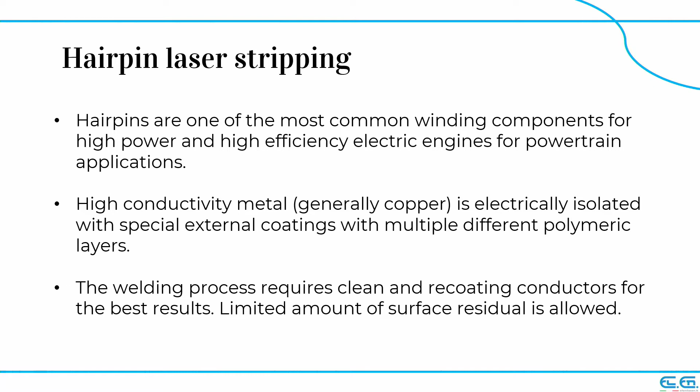We have been listening to welding applications, and we have a very smart solution for improving the quality of welding, but the first thing to take care of is to prepare the hairpin for welding. Otherwise, all the tricks are much less effective. So what our welder friends want to get is a really clean hairpin, without or with the smallest amount of residual on the surface.

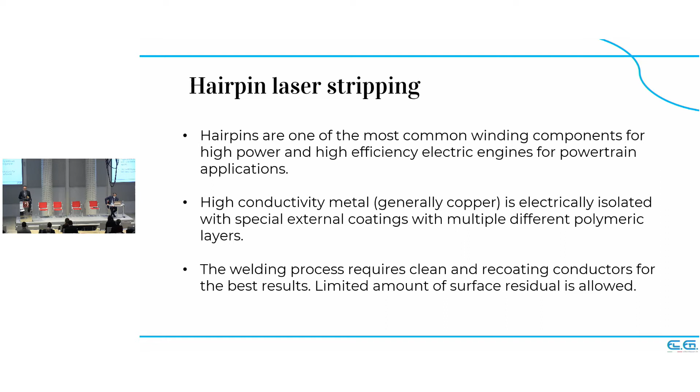So to prepare hairpins we have two ways: one is mechanical, with tools, or using lasers. Users say that the traditional approach is much less flexible and has some disadvantages in terms of how the copper is treated. That said, to get the proper quality, the settings—especially if you change the dimension of the hairpin—require time and skillness.

The laser is a fast, efficient, accurate, industrial proven process. Obviously, the laser doesn't have any contact tools, so the parameters can be safely stored in the recipes, so you can change production very easily, getting the machine set up in no time, practically.

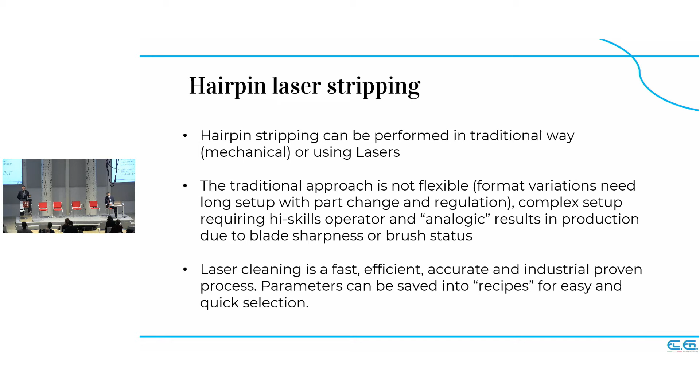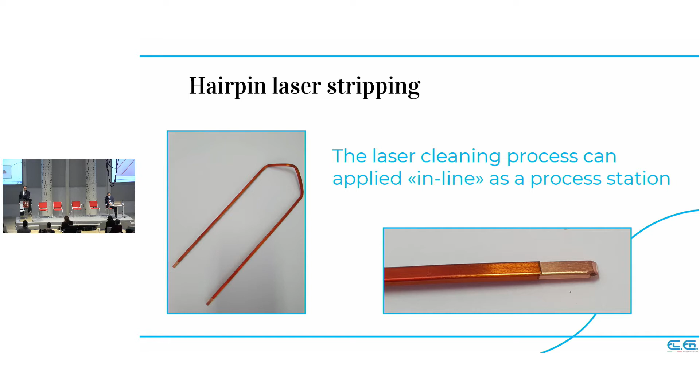We are still in love with CO2 laser, because we are seeing new applications every day. So we started from CO2 application—CO2 wire stripping is, let's say, an old application, and that was the starting point, especially for us, for cleaning up the hairpin. We ended up finding that CO2 itself was not fully cleaning the copper, and so we coupled CO2 with fiber lasers.

How we do it is that we have the stripping station that is based on laser sources and the galvo scanning system in order to speed up the cleaning process. Usually what it is, we have a galvo head controlled by fast, real-time, software-driven embedded solution that can work on the fly. So it means that we don't need any stop-and-go process based on laser needs. We can remove all the insulator around the conductor while it moves, and while the line is forming the hairpin.

The quality of the cleaning, meaning how much of the isolating coating of the copper is removed, at the very beginning looked to be an easy job, because the copper looked very clean after just a quick pass of CO2. But then we realized that the micron-thick residual that was on the copper was not really friendly with the further processes like welding.

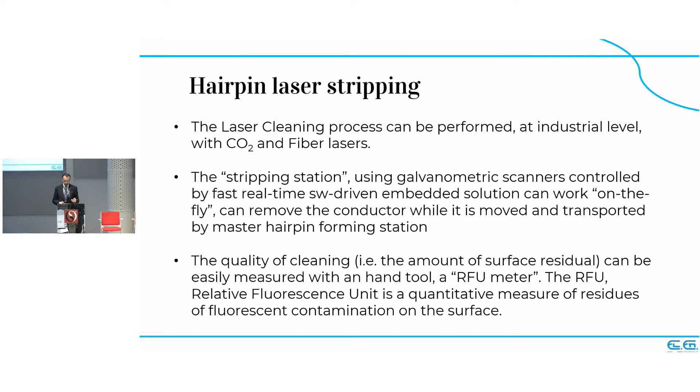So El.En. has developed... we started at the beginning with little players, then now we are working, and this is disclosable, with Atop, that is an IMA group company, with which we have developed an electro-optical platform that is available for integrators. So it consists in laser sources, galvo scanners, hardware controllers, software development kit for PLC integration, and it's the whole solution for the stripping process.

We are in love with CO2, but we have realized that it's a combination of the two lasers that gives the best results. So our platform includes both CO2 and fiber lasers. What we do is have the CO2 doing the dirty job, meaning we use CO2 power to clean up the major part of the isolators. And we use CO2 lasers that range from 300 to 700 watts. The more power you use, the quicker the process.

The advantages of this solution is that the absorption of the radiation of CO2, the 10.6 microns, is very selectively absorbed by the material. So as long as we talk about the plastic-based, polymers-based coatings, they are easily sublimated by CO2. They fully absorb CO2, and the CO2 stops when it hits the copper. So there is no real interaction between copper and laser. We don't heat up the copper, and we don't touch the surface. We don't engrave it. We don't scratch it at all.

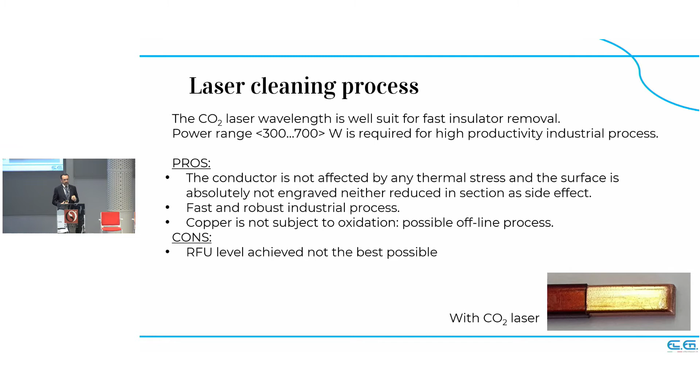It's a fast and robust process because, given the fact that we have this selectivity in absorption, we don't really have to care about very fine tuning, because we have a nice threshold that works with us. Given the fact that CO2 leaves this micron of material, the copper that is cleaned by CO2 doesn't oxidize because we still have this tiny protection. Obviously, this can also be a disadvantage because we still have these little contaminants on the surface that we can test with a few instruments.

So in order to provide a full clean surface, we have coupled CO2 with a mid-power pulse fiber laser. We don't need too much power with the fiber laser, but we still need it to get rid of this very tiny insulant left. So advantages are that we can reach very low RFU values, meaning no polymer is left on the surface, or almost none. And this allows, obviously, a good welding process afterwards.

In this way, we don't have too much production of smoke and dust, because, as I said before, the dirty job is all done by the CO2 previous treatments. Users tend to say that we have disadvantages, like the fact that in this case we don't have the famous threshold I was mentioning before, so we have to fine-tune the process in order not to have the powerful fiber laser be too aggressive on the copper surface. And having a clean copper surface, it oxidizes much more quickly.

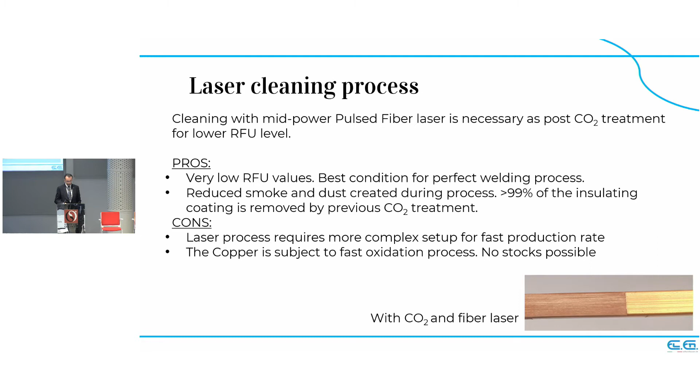So this is the standard architecture. We have the first station that is CO2-based, with two galvo scanner heads that clean up the major part of the isolating on the copper. This is the typical mirror-based beam path. And then we have the same architecture in terms of lightening the wire, but the two scanners in this case are fitted with fiber lasers.

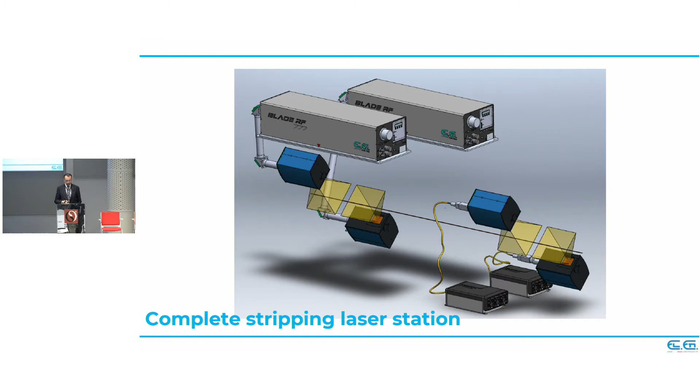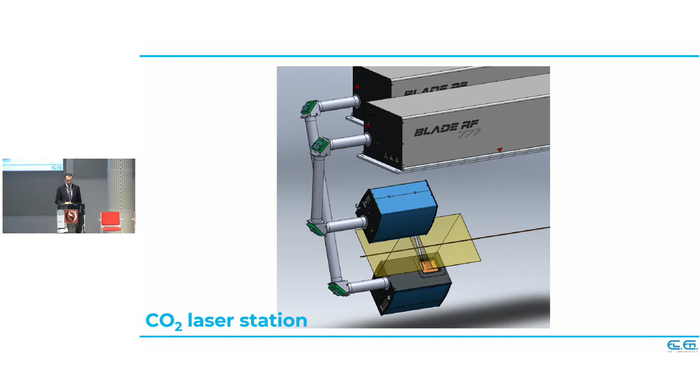We have been talking and thinking about the best geometry in terms of how many heads to use in order to speed up the process and keep the cost of the plant reasonable. We still think that two couples is the best optimization based on our experience. We tend not to have the two scanners light up each other - it's manageable, but this way it's a safer solution, as we have tested, especially in mass production.

The fiber laser on which we base the fiber station is IPG, because it's the best compromise we have found, both in terms of quality and price, and we have long-term experience with this kind of laser, so we know them very well and we trust them.

In terms of CO2, it's fully made in-house, and we have rejuvenated the CO2 laser concept, having our never-ending power solution that is based on lasers that have got a laser cartridge able to refill the laser.

So we have this family of lasers that goes from 350 watt up to 850 on the same size of laser. Then we have also higher power up to 1.5 kilowatt based on this self-refilling technology. We're talking about a pulse laser that can reach peaks up to 1800 watts in this family range.

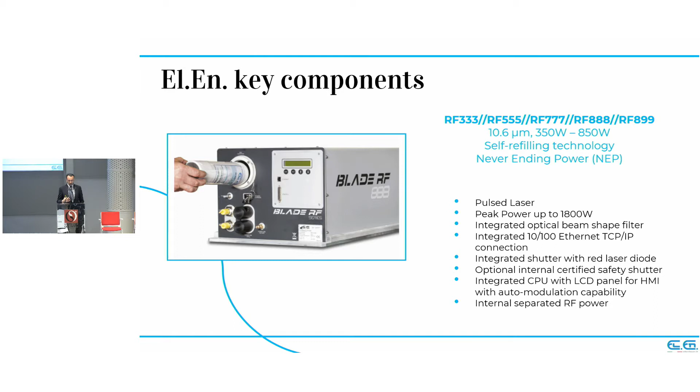We have the spatial filtering inside, so we have a very nice zero-zero mode, M-square output. We have integrated 10/100 Ethernet TCP/IP connection, shutter with red diode laser in it, and this is very helpful for the tuning of the process, for the alignment. Safety shutter - we have a lot of supports to make the laser very easy to integrate.

I'll skip the little movie about the self-refilling technology, but this is something that allows the laser not to need to be refurbished or replaced over time, because virtually it's a never-ending laser - everything that gets worn in the laser can be easily refilled by this gas cartridge that we provide. Especially in the automotive industry, where downtime is not an option, this kind of laser allows a virtually endless and very stable process with constant and consistent power.

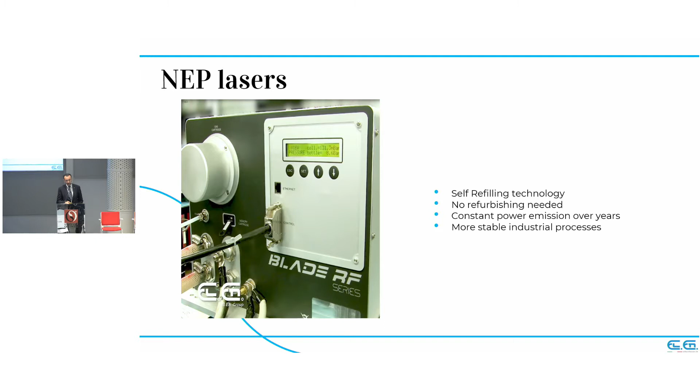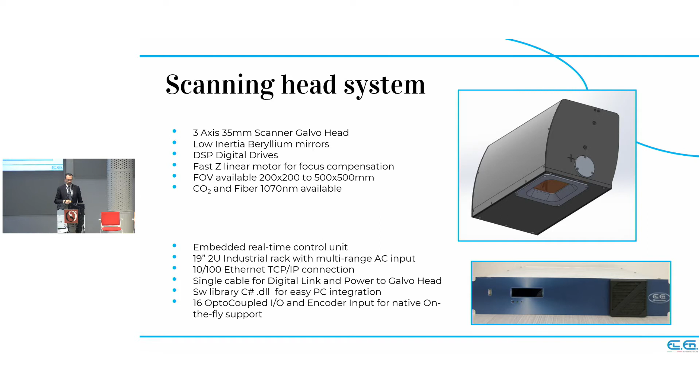The other key component of the station is the galvo head, which for this application is a 3-axis, 35 millimeter optical aperture scanner galvo head with very low inertia beryllium or special alloy mirrors driven by digital drivers, with a third axis that in real time adapts the focusing of the laser, and a field of view that goes up to 500 by 500, which we've seen is what we need in this field. Usually our heads are able to manage both CO2 and 1 micron fiber laser.

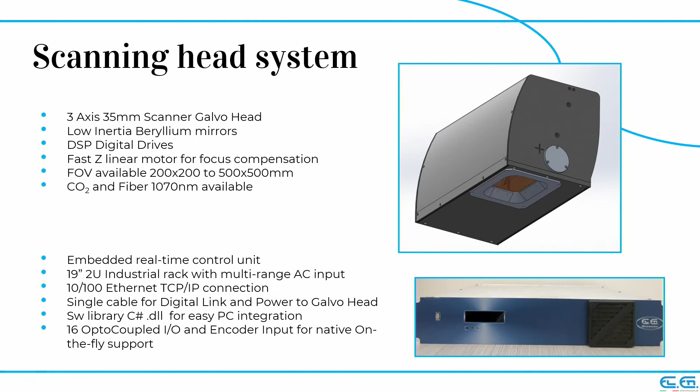The control unit - we provide the whole system: laser source, galvo head, and the control unit itself. It's a real-time one, standard industrial 19 inches, 2 units industrial rack with multi-range AC input, Ethernet connections, a simple single cable that links the control with the head for both signal and power, software library available, and optocoupled I/O to connect to the rest of the system and encoder input for inline processes. So this is the quickest way to show you what we deal with.

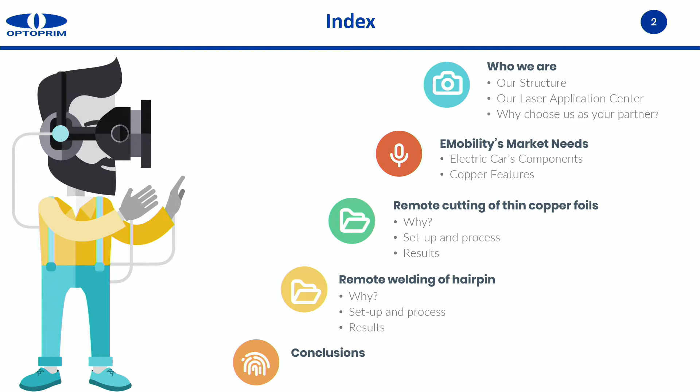So who we are: Optoprim was established in 1994 in France as a distributor for optical components, then expanded in 1999 into Italy, and in 2004 into Germany. Nowadays we are about 85 people, 30 of which are in Italy.

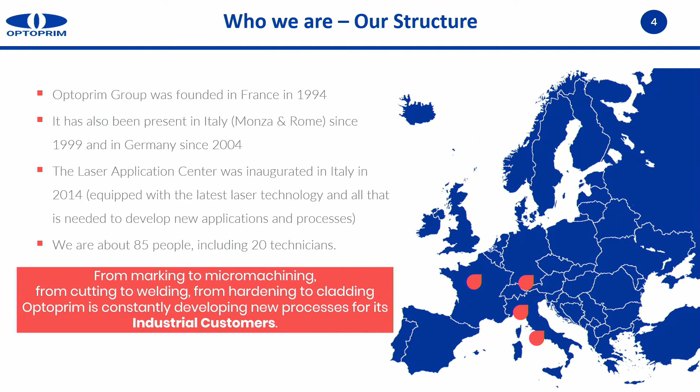The main turning point, which I'd like to stress in this speech, is that in 2014 we established in Italy a laser application lab. The target of this small section of Optoprim, which is actually growing, is to deal with applications from customers and use the knowledge we've gained over the past years as distributors.

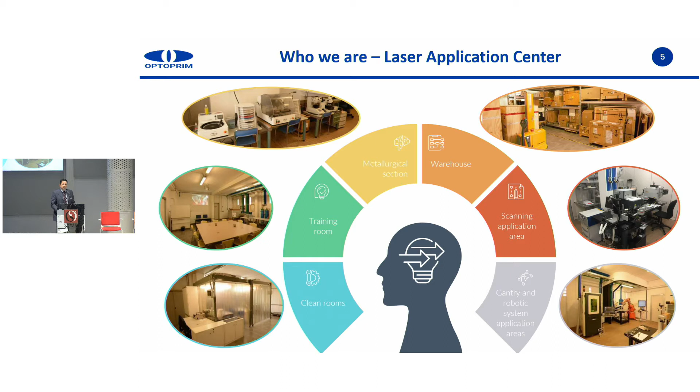This is a quick overview of how the application lab looks today. We are quickly moving into another building where the application lab will be larger, with dedicated cells for applications. We deal with several kinds of lasers, different wavelengths from CW to femtosecond, and also with optics and measurement instruments which enable us to check how the laser is performing.

And also to check the results of the process we've performed. For the types of applications, as we have different application engineers in the lab, we focus on different applications with specially selected people. We cover everything from cutting to micromachining, welding, brazing, any kind of application that can be done with lasers, and we have the key components to properly deal with each of these.

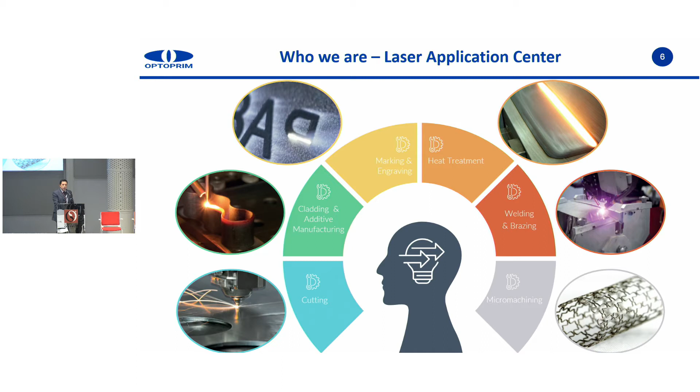So why are we offering ourselves as a partner to integrators in Italy and Europe? As said, due to our knowledge from being a distributor for several years, we are in touch with the key world players for the different parts you need for a laser system. We can select the technology depending on the needs of your specific application, and we have the experience to put together the different parts to get the best out of it.

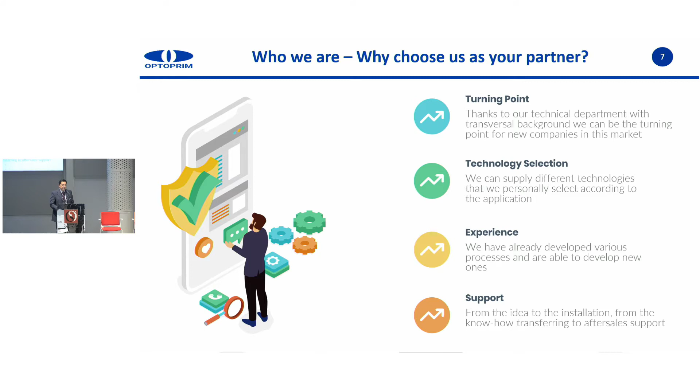Also, we support our customers in doing the initial tests, supplying the subsystem, installing and getting it running, and also providing after-sales support.

This has already been covered in a previous discussion, so I'll go through it briefly. In e-mobility and building an electric vehicle, you have several items where laser can be used to address specific needs, mainly batteries, packaging and pairing, and also the stator. Here you need laser for cutting, welding, marking — all of which can be addressed by our solutions in our lab.

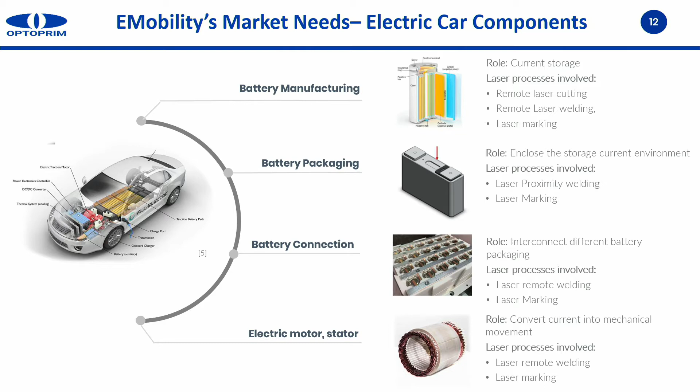As said, for building this new equipment, you need to use specific materials, and some of them are trickier to use with laser. I wanted to focus here on copper.

It has already been said that copper at ambient temperature has low absorption in the infrared wavelengths, but has higher absorption in the blue. So depending on the specific need, you would either go for higher intensity infrared or instead move to shorter wavelengths — and we can do both. We have setups that can cover both demands, and in some cases the first one is winning, while the second has other advantages.

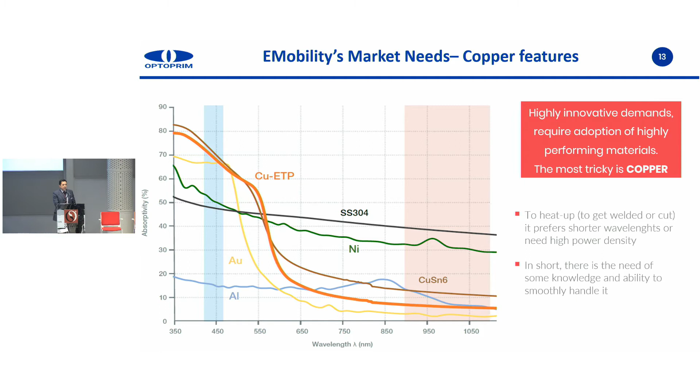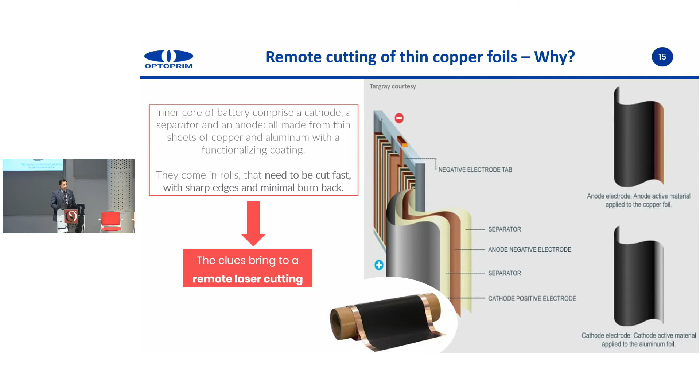Let's look at the first application, regarding the manufacturing of the internal part of the battery, where you have to deal with thin sheets of copper, aluminum, and also a coating on top. As these come in rolls, you need to cut them with good geometries, without or with very little burned part.

All this information tells us that the approach is to use remote laser cutting, based on a laser. In this application we use an infrared fiber laser with single mode, so we can have a very fine beam and higher intensity to properly treat copper, along with a scan head with an f-theta lens that lets us go very fast and cut over a large area of these foils.

The material in this specific case was copper, usually 20 micron thickness, with a coating on top bringing the total thickness up to 150 microns.

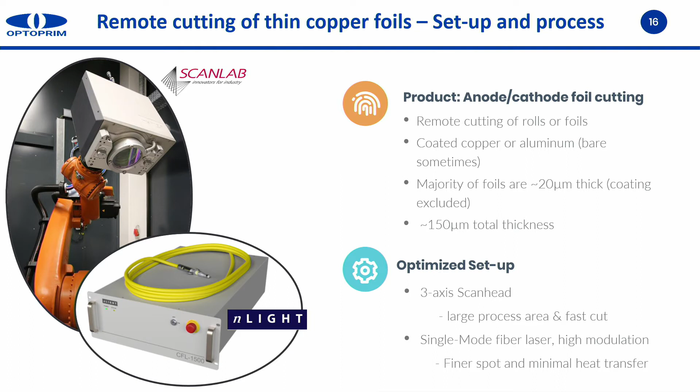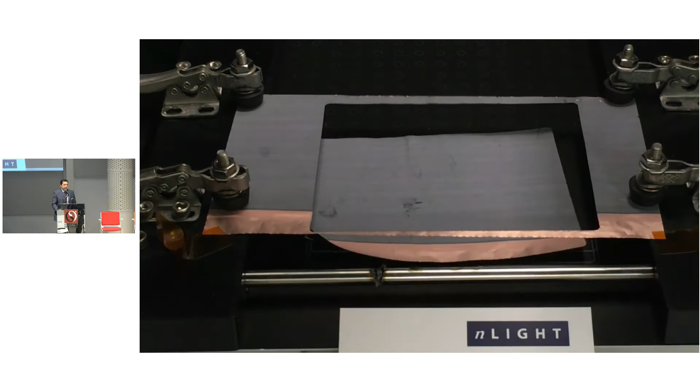Here is the result. As you can see, it's a very fast and very nice cut. Afterwards we had an overview of the result on the cut side, and we were able to achieve what the customer was asking for: a depletion zone below 25 microns, the area where the overlay part is still present, and a minimal burr on the cut.

The advantages of this approach are that it's more flexible than mechanical cutting, so you can change shapes, and it has a modular design where you can add multiple lasers and multiple heads to get higher throughput.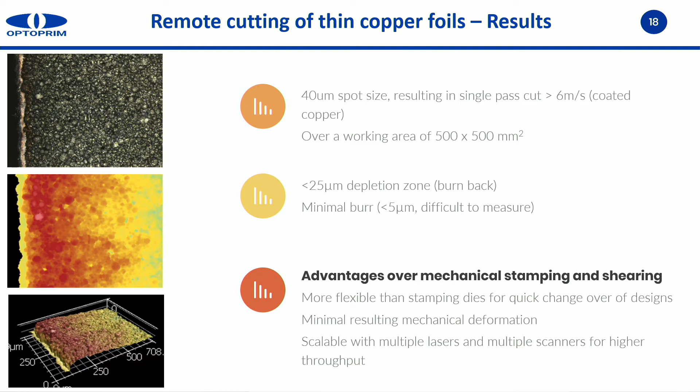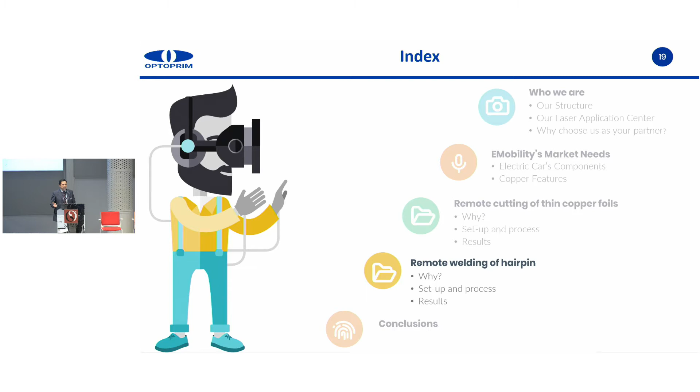Next, we wanted to give an overview of what we are capable of. The first one was cutting with an infrared laser. The next one will instead be welding with the blue laser, and this is where we think there's a benefit.

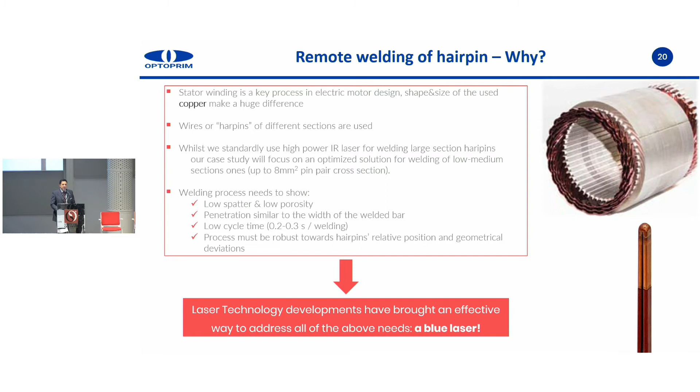Stator design requires the use of copper in different shapes, stripes or hairpins, also different sections. So different approaches are required depending on the specific need.

Infrared has already been seen, and we have the ability to use this as well with wobbling, but we wanted to show a different application where, for sections up to 8 millimeters square, you can benefit from what the blue laser technology has brought.

What the weld needs to provide is low spatter, low porosity, a good penetration depth, and low cycle time. Also, the process must be robust against some mechanical misalignment, since during the positioning of the pins there might be some unwanted misalignment.

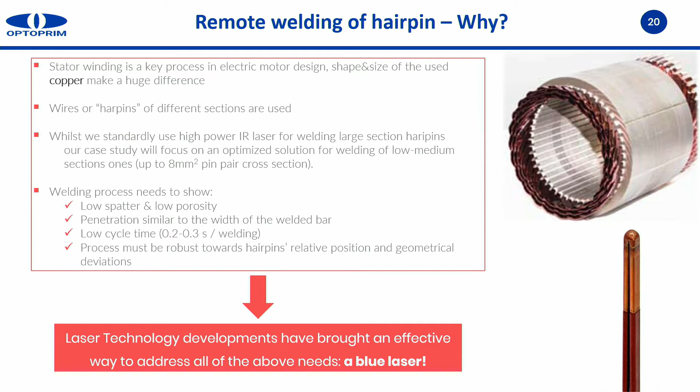So either you have a vision system which helps you achieve good positioning, or we can have a more tolerant setup that can support you.

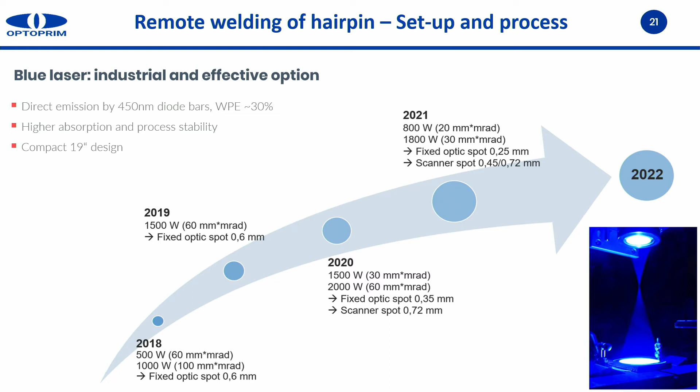Blue laser has already been discussed a bit, but I wanted to stress that blue laser has already been in industry and manufacturing for several years, so it's a reliable source that has been used widely. It started with 500 watts in 2018 and has been growing in power and application spread.

Nowadays we are able to supply 800 watts when used through a scan head, or up to 1.8 kilowatts with a fixed head, and by the end of this year this power will increase further. The other advantage is that it's based on direct emission of diodes, so there's no conversion efficiency loss and there's a very high wall plug efficiency.

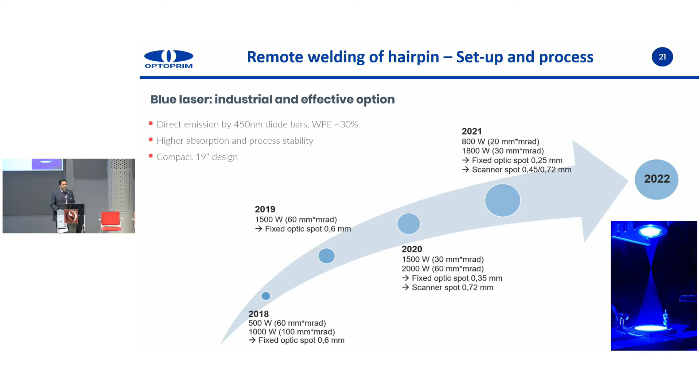The application here is welding of hairpins. The setup uses a two-axis scan head to correctly position over the different pins available on the working area, and we're using a 1 kilowatt blue laser coupled to the scan head.

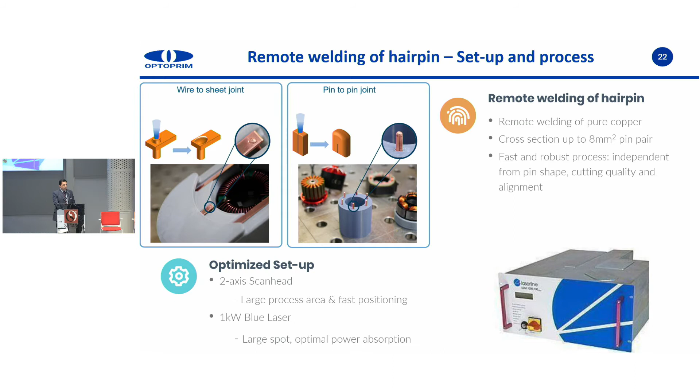This results in a large spot, which gives some benefit, and an optimal power absorption, as copper is very absorbing immediately at this wavelength.

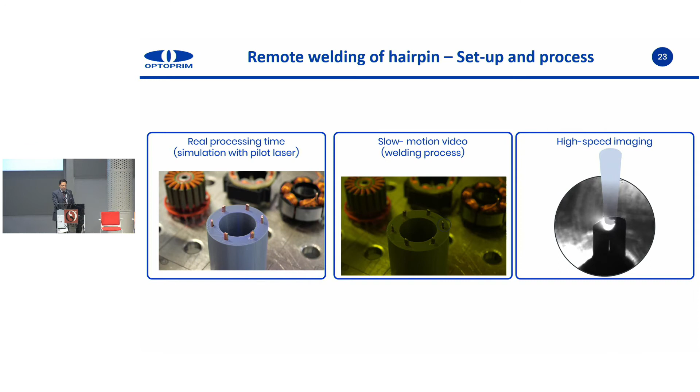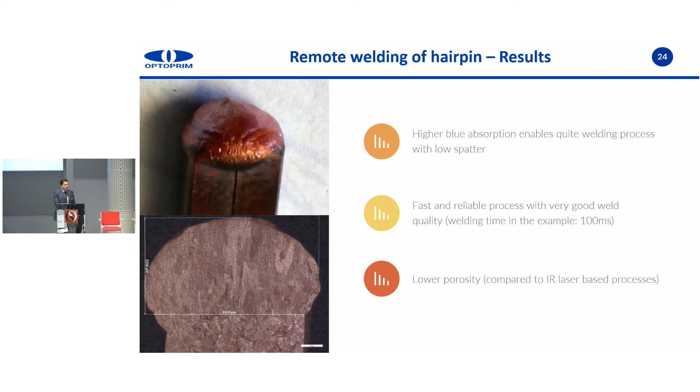We inspected the sample, and again, due to the high absorption of the blue laser, we have a fast, reliable process with very good weld quality. Through the cross-section you can see that the porosity is very minimal.

The other advantage is that in this setup you can have a spot on the sample ranging between 500 up to 700 microns, so it can be more robust depending on the different sizes of the hairpins, or if there is any misalignment between them.

In this video you can see that with the same setup you can easily process different parts with different shapes, and even if parts are misaligned, the larger spot bridges the difference, the gaps between the two.

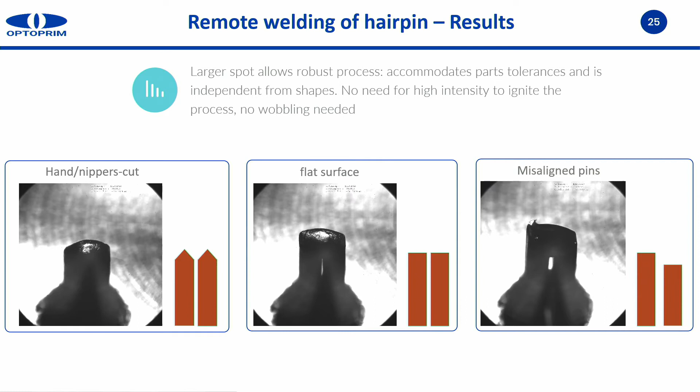Also, you are capable to do other stuff where maybe you have a bundle of wires, and as the spot is large, as the absorption is high, you can easily melt them properly together. In the video, you see that the process is very quick and calm, and on the other side you can see the quality of the weld.

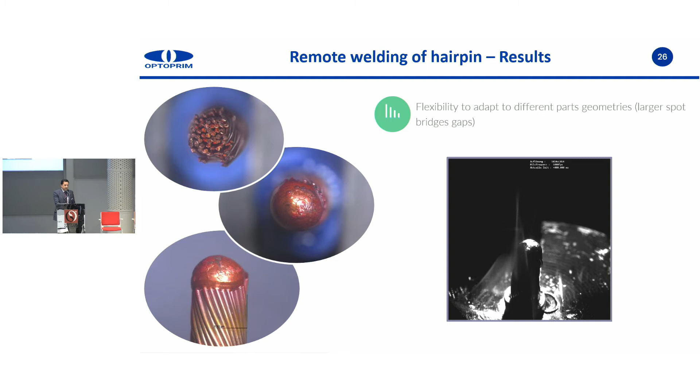As a conclusion, I just want to highlight that we have a comprehensive set of lasers and heads in order to process virtually any laser application. We have the experience and knowledge of our company, but also the support of our partners worldwide. Our core business is the success of our industrial customers, so we want to be their R&D lab for lasers. We are not dealing with integration of production lines, we just want to add our knowledge to the knowledge of the customer.

The turning point for our customer will be drastically reduced time to market, which is crucial in this specific opportunity, and we are able to supply a very reliable product. So this is the end of my presentation. I thank you for that, and I invite you to visit our tabletop in the other room, where we have another system running, and we have some giveaways for you to remember Optoprim in the future days. Thank you.

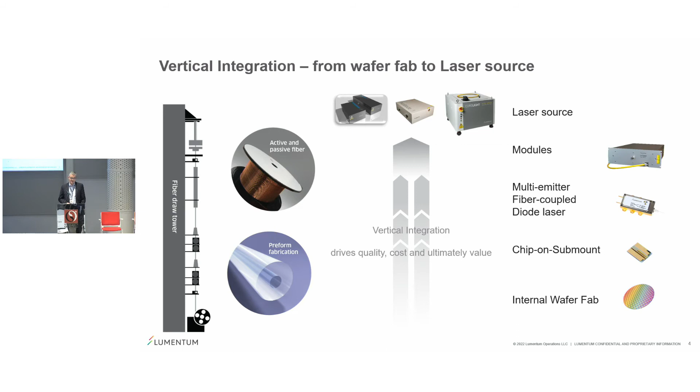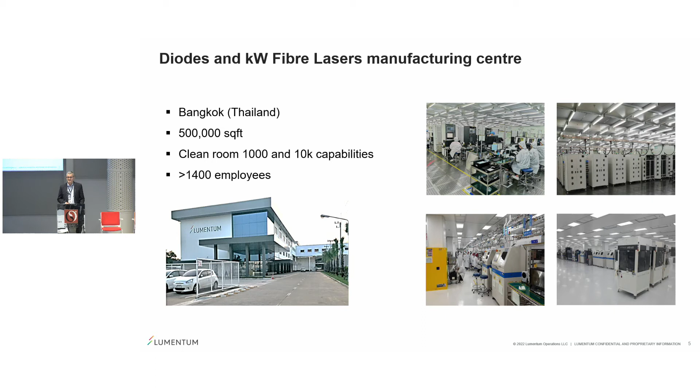In terms of technology, we are vertically integrated. So we start at the wafer level and go up to the end product, the laser you would be using in your machine. And the optical content typically inside is usually Lumentum most of the time. And we make our own fiber, we make our own chips, and we assemble these in our facility in Asia, where we have 500,000 square feet. So this is our main facility in Thailand. And obviously we are using contract manufacturers located all over the world, typically in Taiwan, China, and Thailand again, to make sure we can address this fluctuating demand of our customers.

So why does electrode processing matter? Basically, first of all, I think what you want to do is take it from the end user angle. You've all heard that battery capacity is going to go through the roof. It will increase from 500 gigawatt to 3 terawatts. Depending on the analyst, you can actually pick any number from 2 to 4. So the demand is going to be big.

We know that. However, what people know less is if you take, as an example, a BMW i4, 40% of the cost of the car is actually coming from the battery pack cost, which represents the major cost item within the bill of material. 75% of this pack cost actually comes from the battery cells, the electrodes, with the remaining 25% coming from the module and the pack only.

So gigafactories as well, what you need to understand is they operate on a very low operating margin. And as you know, the cell cost has been decreasing dramatically over the last few years, and they expect it to decrease dramatically over the next few years by at least 50%, based on what we understand. It's actually very important for them to control the yield, the reject cost, and be able to support the highest throughput possible.

However, this trend started from Asia. I would say the Asian suppliers, in terms of gigafactories, in terms of ecosystem, in terms of machine builders, are literally 3 to 5 years ahead when you compare this to the machine builders or gigafactories in Europe or in North America. And they've been doing this for a long time.

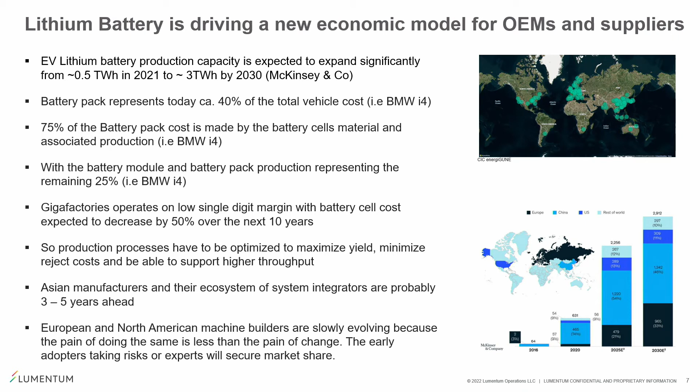So for European and North American machine builders, the ones who are slowly evolving, it represents actually a major interest sometimes to jump from the mechanical process to the laser process, because it's a risk, it's an investment going away from mechanical to laser, and usually the pain of staying the same is basically less than the pain of change. So typically what you would see in Europe, for example, is in terms of machine builders, the big machine builders have already embraced laser, but the typical medium size, small size have not already embraced this kind of technology.

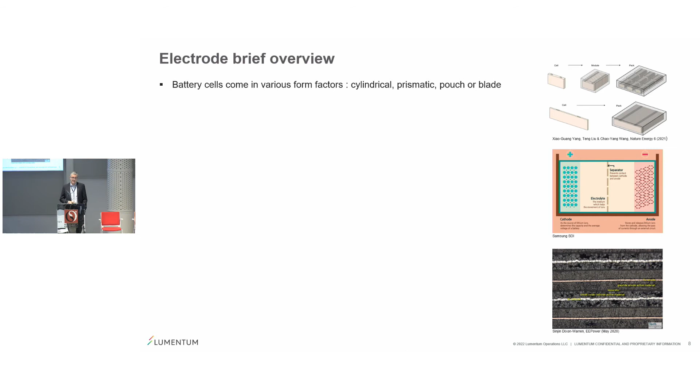So before going through the laser itself, I wanted to share with you a bit more, for the ones who are not familiar with the electrode, what they are composed of, what they are doing. Basically, the cell comes in various form factors. They basically can be cylindrical, prismatic, or pouch, or blade. The cells are basically assembled then into module and pack, and the cell itself is composed of 4 parameters.

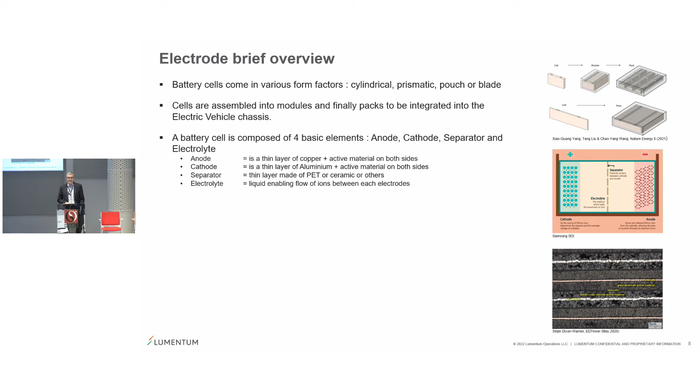The first one is the anode. The anode is a small layer of copper, typically in the tens of microns, with an active material on both sides, typically graphite. The cathode is aluminum-based. Again, it's a very thin layer in the order of tens of microns or less, with an active material on both sides. There you have more exotic materials, and it depends a lot from one gigafactory to another. There's a lot of variability in that space, so you don't have one size fits all. You can have materials like NMC 622, 811, or any other type actually that they're looking at today. It's very versatile. The separator can be a sort of PET, PE, ceramic, or some other material, very thin.

And finally, you have the liquid electrolyte in between, which facilitates the traffic of ions from one electrode to another. The electrodes, the anode and cathode, are manufactured through a very complex roll-to-roll process.

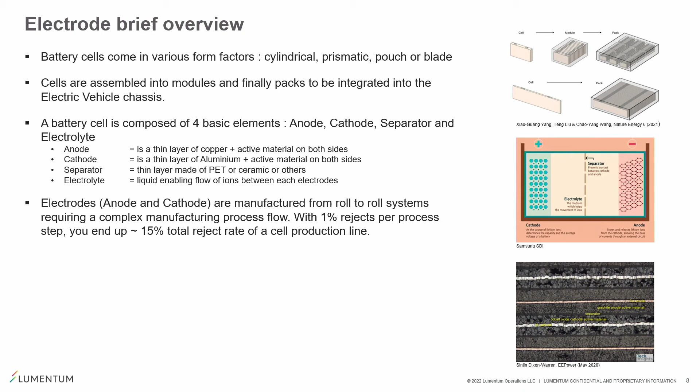There are so many steps in this process that even if you consider a 1% reject rate, you end up with a 15% yield drop, which is huge in terms of manufacturing. In our laser space, when we make lasers, a yield impact of 15% is enormous, not acceptable. It's the same in this space. That's why they are dealing with a single-digit operating margin.

On top of that, new electrode technologies are coming in, things like silicon anode or lithium metal anode, semi or solid state, oxide, ceramic electrolyte. My background is physics - I learned more in chemistry over the last 2 years than I wanted to imagine, to be honest. There are many types which are going to come over the next 5 to 10 years to disrupt what people are currently using, simply because they want your car to go longer and faster with this new technology.

So the adoption curve that everybody saw so far is not going to be as exponential as everybody says. Yes, we're all going to drive an electric car at some point, but it's actually going to be slowed down because there's going to be raw material shortages. All analysts predict that nickel, for example, will be in short supply within 1 year. Lithium will be in short supply within 3 years, and cobalt will be the same. So there's going to be a bottleneck at the raw material level.

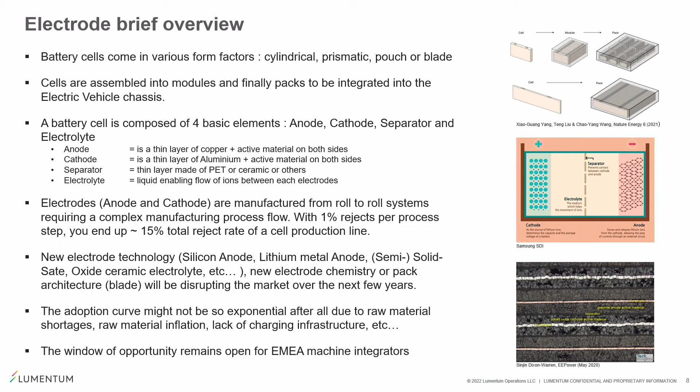Price is not going to go down as expected. It will actually be higher in 2022 in terms of material cost and cell cost. So it's going to make life tougher for the gigafactories and make them master even better their electrode manufacturing. So the window of opportunity for EMEA machine builders is actually great, meaning the ones who haven't embraced laser technology yet will be able to do so and catch up - they haven't basically totally lost the battle here.

So what's the technology used today? Today it's primarily mechanical solutions. People are using, for example, knives for cutting or stamping. You can see here in green on the right-hand side what people call slitting, which is basically when you cut the mother roll in two to get the daughter roll. The cutting is usually vertical, and the notching is when you create the tab.

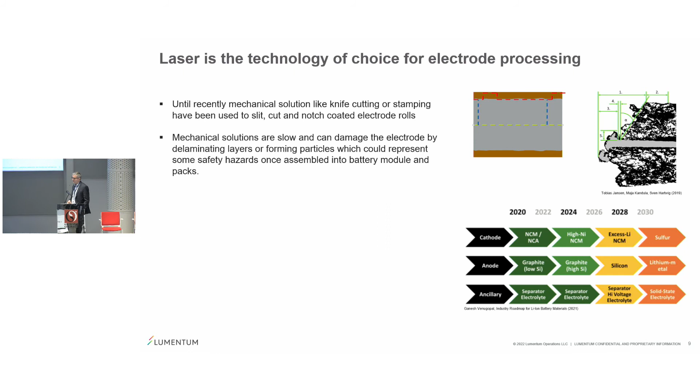And the mechanical solutions typically are slow. They create damage, they create delamination. So if you see, for example, the current collector here on the right, with a mechanical solution you occasionally get delamination between the current collector and the active material on both sides.

So it creates safety hazards once assembled into modules and packs. The mechanical tools also require maintenance - they wear and tear. A laser does the same, but in terms of service time, a laser can run 20, 30,000 hours. A mechanical tool will not - you have to basically change it and upgrade it on a regular basis.

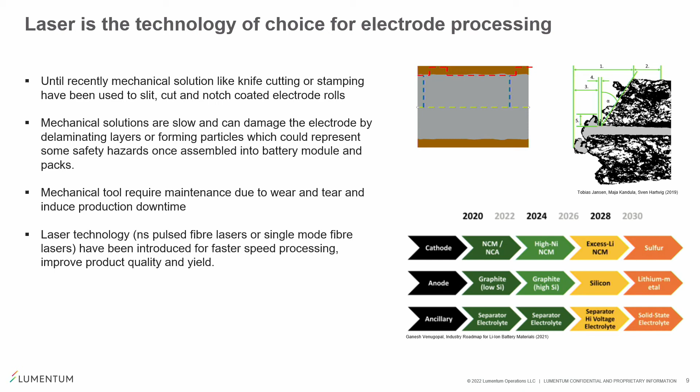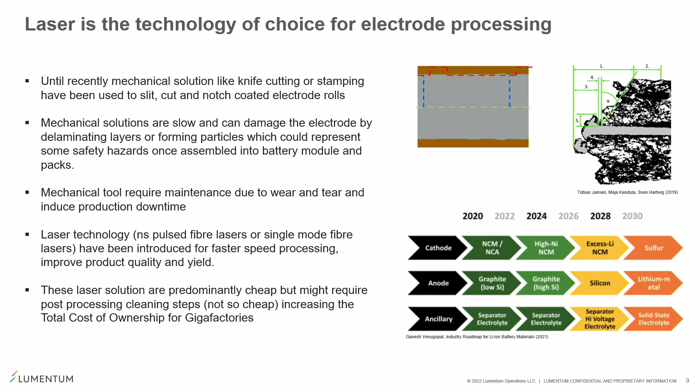So laser technology like nanosecond or single-mode lasers have been introduced over the last few years, starting first in Asia but getting introduced slowly but surely in Europe and the US. They have improved the speed and the quality. But this solution sometimes, if you go into the details, requires a cleaning process. So although the laser on one side is cheap, the additional step for cleaning is not so cheap when you consider the total cost of ownership.

So what are we trying to achieve? First of all, there are two conflicts - actually it's a three-dimensional problem. There are many conflicts in this problem. The first one is between cost and energy.

If you look at how this electrode market is segmented, if you want to go low cost and low energy, there are many types of batteries you can find on the market today in Asia based on LFP type electrodes. When you go into medium cost and mid-range energy, NMC starts to be the predominant technology of choice, 622, 811. And after that there are more exotic materials when you want to go high energy. The problem with these is they become high cost, and it's not something you want to have in your car - it's not something which will facilitate the adoption curve of EV batteries.

So ideally, you want to be low cost, high energy. On the other side, there's a second conflict between energy density and power, and power density.

Usually here, the conflict is the electrode design is not the same, and you end up with two different types of electrodes. Usually the one which helps you go far but will charge slow, which people call the marathon runner, typically are thick and densified electrode with a thin collector. On the other hand, when you want power, unfortunately, the one which charges fast and drives short will be thinner with porous material.

This is very important because if you understand the chemistry and structure of the electrode, you will understand that the interaction between the laser energy and the material will be different. So you can't use the laser in both configurations, right? The interaction between the energy coming from the laser beam and the material will be different.

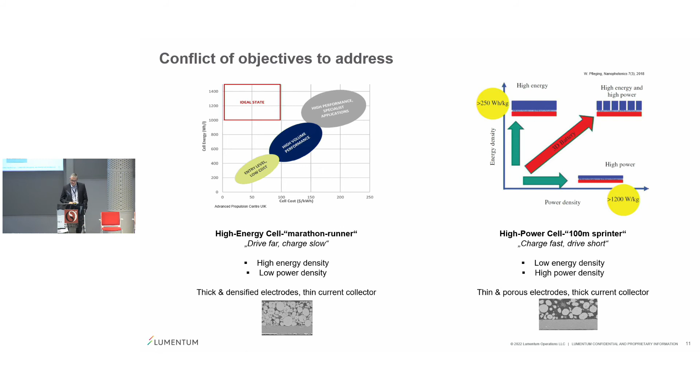Now to make sure you understand even further, I took this from a car OEM perspective. From a user perspective, all this OEM car wants: they want to extend the range, extend power, improve safety, they don't want your car to burn in your garage when you recharge it, and they want this to be affordable. They want the total cost of ownership to be low.

So how does electrode processing enable that? First, to improve range and performance, you need to improve the cell energy density and power. To do that you have two options. You go below on the graph here, you improve the cutting quality, and to do that you reduce HAZ, the heat affected zone, which is basically dead material, a loss of zone for energy within the electrode. Although it's so small, when you scale this to the size of the car and the number of electrodes you need, you realize you miss quite a good percentage which enables your car to go further.

The second part, which enables power, is more on the electrode structuring. What you do, as you saw in the previous slides, is create a pattern of small holes or other features within the electrode to increase the wettability of the electrode, the contact surface area between the electrode and the electrolyte. By doing that, you improve performance in terms of power and cycling charge as well.

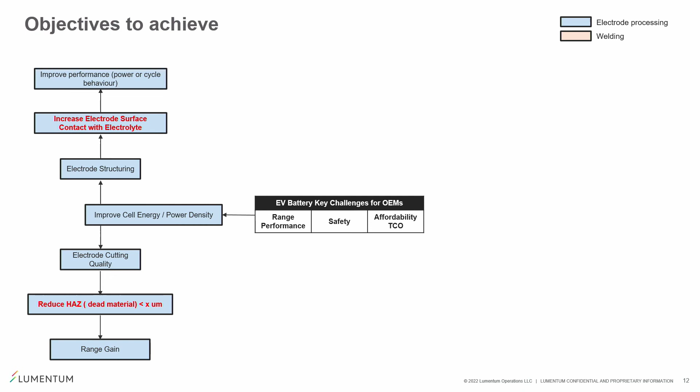Safety is the second factor for OEMs, and the gigafactories typically address that by reducing particle contamination. To do that, again, it's cutting quality. There you end up with two families of problems: one is detached particles, which you don't want on your electrode because they will short circuit it at some point, creating runaways and making your battery go into flame. And you want to make sure about the burr, the particle still attached.

Okay, I'm saturating the mic. Thank you. Thank you very much.

The second part is reducing the burr, which is sticking on the current collector in the Z and X axis. For the Z axis, it's the most important one—this is the one you want to reduce because it's going to perforate the separator and short circuit the anode with the cathode. Typically what people look at is a feature which is half less than the size of the separator.

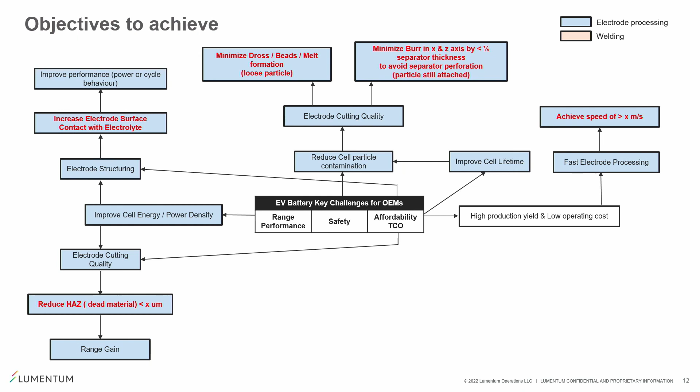Finally, on the affordability side, you want to make your cell more and more efficient. If you have more efficient cells, you need fewer cells, so you make your car go further but at the same time make it cheaper. You also want to improve the lifetime of the product—you don't want to change your batteries every 7 or 8 years like today. To do that, you go back to the electrode quality cutting, making sure you reduce the quantity or size of particles.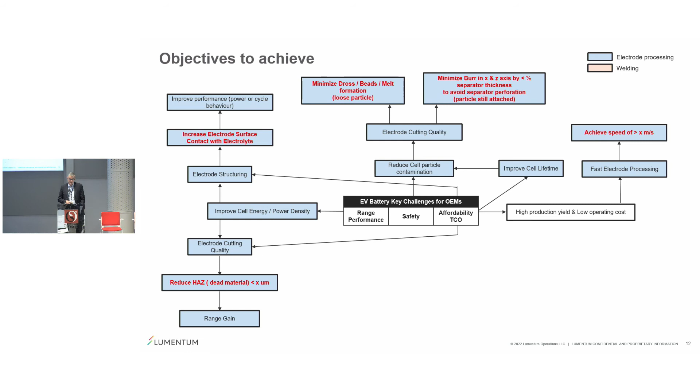Finally, to address the dilemma that gigafactories have—yield and being able to manufacture this in volume—it comes down to speed. You need to improve the process speed, measured in meters per second achievable with your laser. Obviously other processes like welding are important too, but typically they address the safety part.

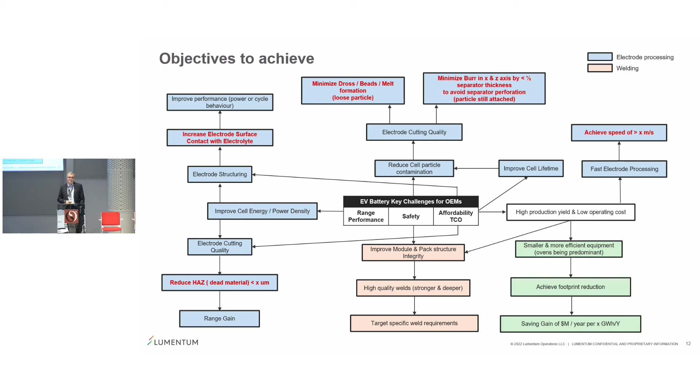It's usually where laser manufacturers are focusing, because this is where the money is. But the gigafactories also need to look at the tools they're using. Today, if you look at the tools in these big gigafactories, the oven is predominantly the equipment taking the maximum size on the floor. Size is money. Size represents the number of electrodes they could manufacture if they had more space available.

So now let's make the connection between what I was describing from the market perspective, from the gigafactory and car OEM's perspective, and relate this with our laser technology, PicoBlade 3, and how FlexBurst can enable better quality cut.

Our PicoBlade 3 is a high-power picosecond laser. It can go up to 200 watts in the IR, 100 watts in green, and 50 watts in the UV. It's got very high pulsed energy, up to 8 megahertz repetition rate with a pulse duration of 10 picoseconds. Like every laser, you need a chiller and a power supply to drive it.

What's important when you use that laser with electrode processing is the FlexBurst technology. You can use a thermal process like a nanosecond or single mode would use to cut, as shown before, but this one-size-fits-all approach to cutting an electrode isn't totally right. If you look at the details of the HAZ, the heat affected zone, in terms of contamination and particles created, it's very important to control that with a semi-cold process. The picosecond pulse is by itself ultra-fast, so it could be considered a cold process, but you actually have to run it thermally, making it less efficient in how it interacts with the material, to make sure you remove the right rate of material.

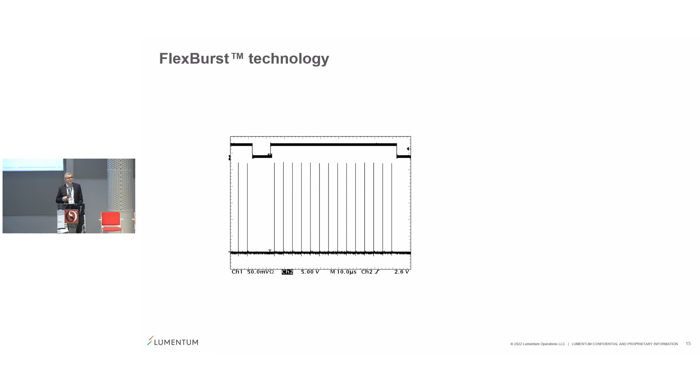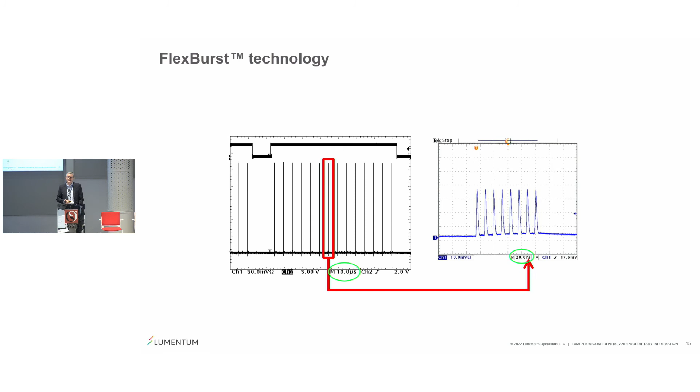To do that, we create a train of bursts within the pulse. So within the pulse, we basically create a profile of pulses, and the advantage of this laser is it's very analogous, not digital, so you can create a pattern almost at will, to preheat or prepare the material to get the best removal rate at the minimum cost. The minimum cost is the impact on HAZ and particle creation that people were explaining before. We can go up with different types of profiles, and play with this at will.

This is done in our application labs within Lumentum. Our engineers can help the machine builders and the gigafactories select the best profile to interact with their material, because each material is different and will not behave the same way.

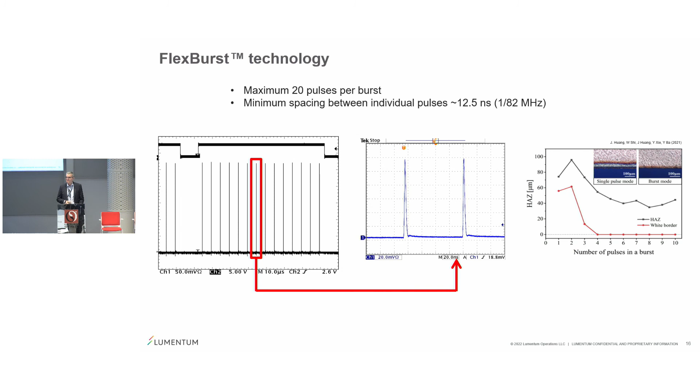We've validated that the HAZ is reduced as you play with the number of bursts - the more bursts you have, the less HAZ you're going to have. This has been validated by third parties in Asia who've been using this type of laser for some time. These are some examples we've done on anode notching, cathode cutting, and separator processing.

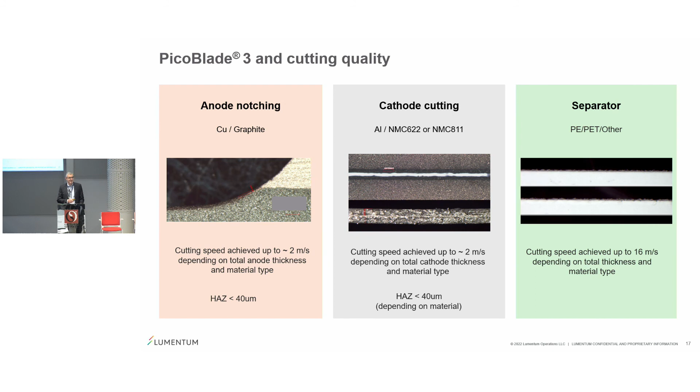Again, it's all about quality. We're focused here on quality, not speed. There's always a trade-off between the speed you want to achieve and the quality. The higher you want the quality, typically the lower the speed. And as you go faster in speed, the quality is lower.

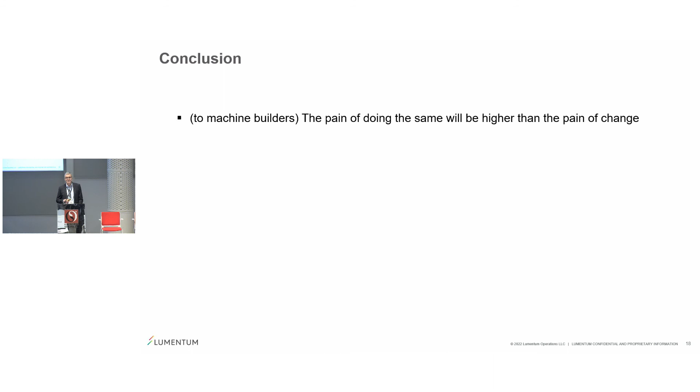So in conclusion, the message to the machine builder is that the pain of staying the same will be higher for you ultimately - you'll have to move at some point from mechanical processing to laser. Why? Because the material will change. People want to go further, they want better electrodes. If you take, for example, the lithium anode, it's a very sticky material. There's no way a mechanical tool will be able to cut at the speed shown before with a mechanical solution. So laser is by default the best option.

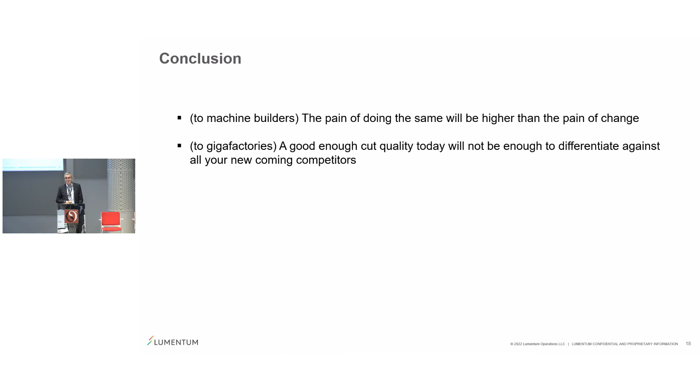To the gigafactories today, it's good enough - most of them look at cut quality from a visual inspection standpoint, or some use a microscope. But if they want to differentiate against the Asian suppliers who've been doing this for years and have large capacity, you'll see that quality is how they'll be able to differentiate. Having the right laser to do that is very important to them. To the OEMs, obviously there are parameters they want to address.

These parameters, I've explained to you before. They rely a lot on how the electrode will be cut, and obviously they'll be able to influence. The ones who have the technical expertise internally and can influence the technology are the key ones who should be talking to the laser manufacturer.

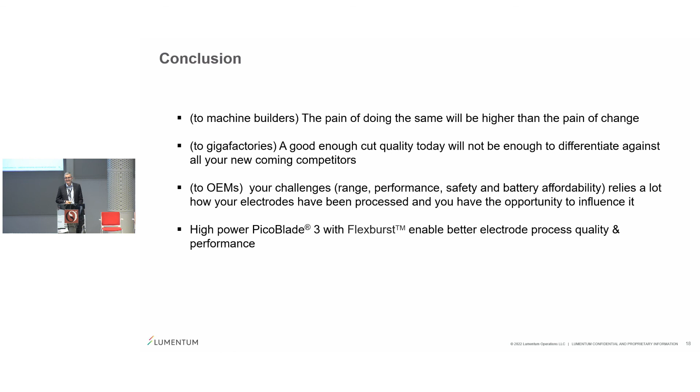What we've shown in our lab, and we're happy to share these results with you at our booth, but obviously not in public because this is confidential: we definitely show that PB3 enables electrode cutting at better quality thanks to our Flexburst. And finally, for the laser manufacturer, the future is bright for sure. Thanks again for your attention.